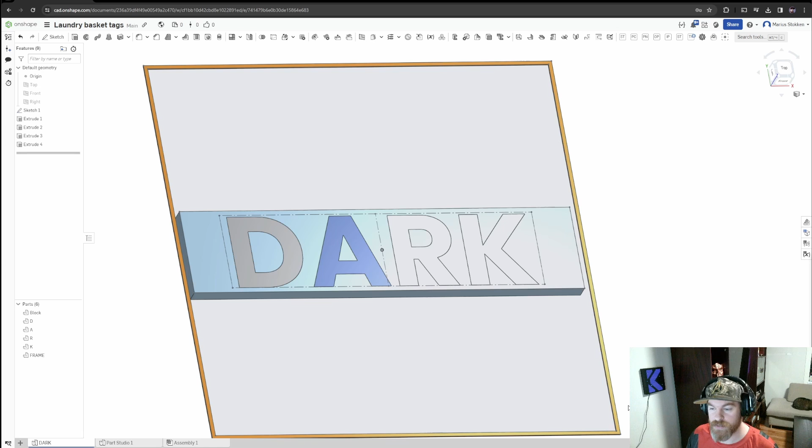So this is the existing thing that we are going to make, but it's not going to be called dark. I could go into my sketch and just rename and work from there, but I want to show you from start to finish how I do this. So in Onshape, and as I've said, this works with any software, I'm going to do this how I like to do it. There may be other ways to do this.

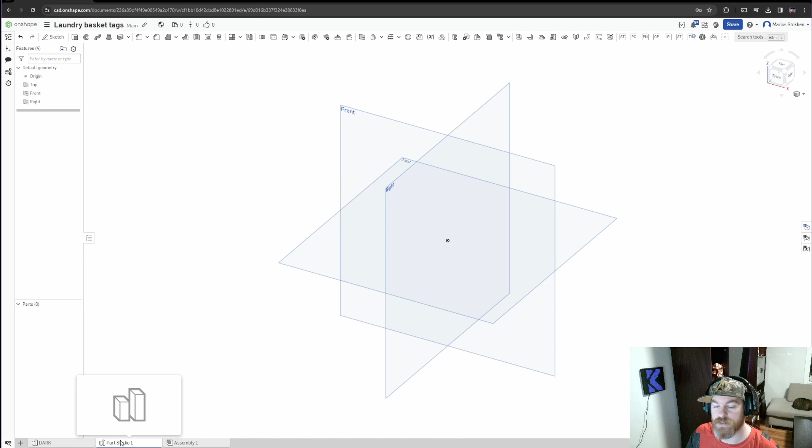First thing I'm going to do is rename this. So I'll call this white, because that's the writing, because I want one of these tags for all my white clothing.

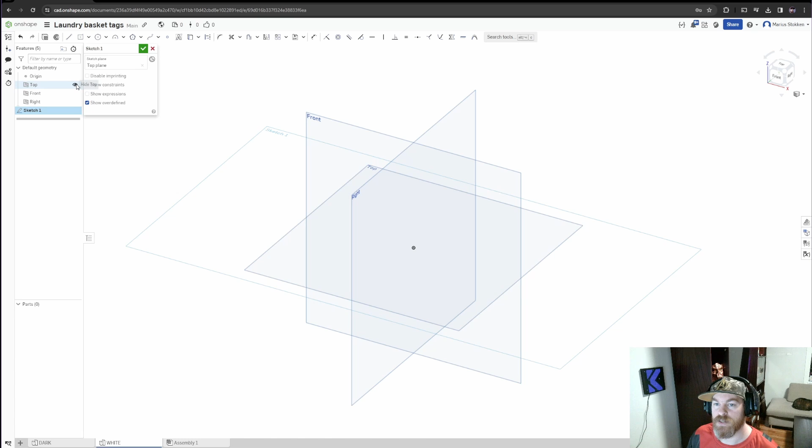And we're going to start by pressing sketch and selecting the face that we want to do this on. I usually just select the top face, and I'll hide these other ones to make it easier to see. Also at the top here, I'm going to orient it so that I can see straight on to what I'm doing. So first thing we're going to do, we're going to set the outside boundary of this.

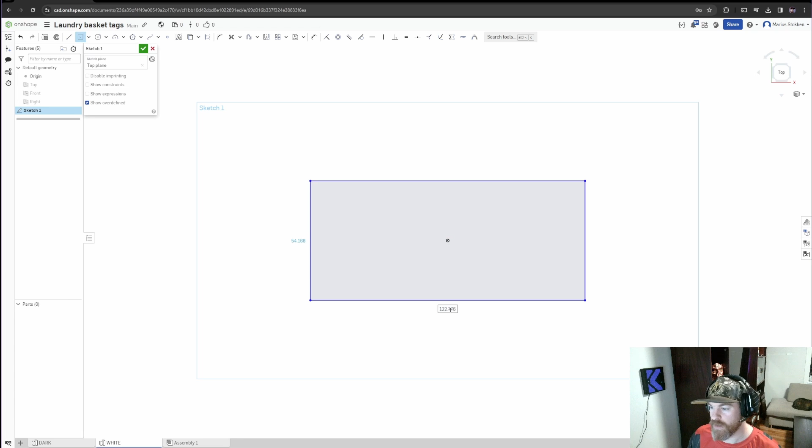So I have that measurement. I'll go to center point rectangle, and I'll just make a box. I don't have to worry about this when making this box. Now you can see that if I hold my mouse over these two values, I can edit them. So I'll type 110 because that's the measurement that I want for this, and then it automatically selects another one. So I'll do 25, that's the other one for this.

And now let's just make a box so that we can resize our text box. This is just how Onshape works. So I'll make a construction box this time, and I'll set it just roughly that size.

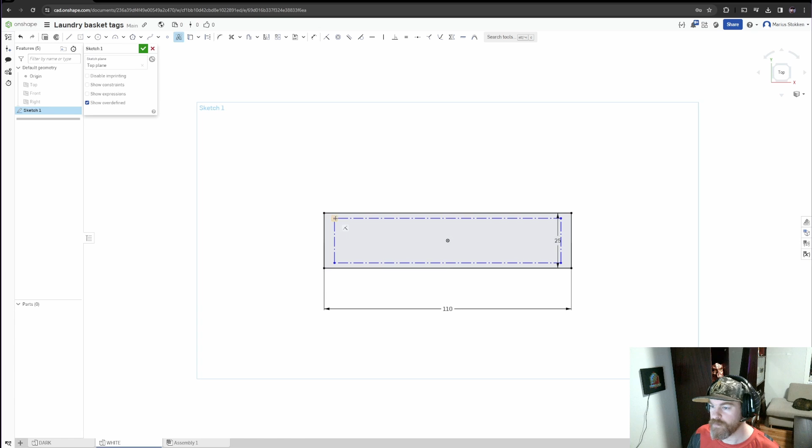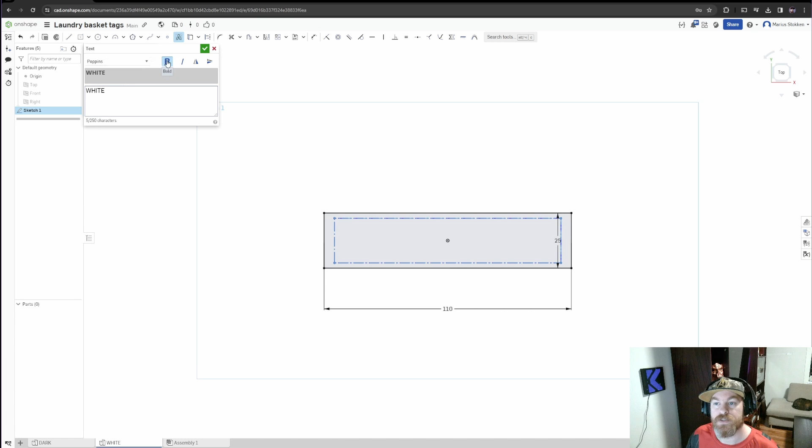And then we'll go to text and make sure we hit both of these two corners right here. That'll lock the text box to the construction box that we've set earlier. And in this text box, I'll just type in white because that is the name. I prefer to do these bold, makes the letters a little bit easier to print. You can choose whatever font you want, for this one I selected Poppins. It's nice and simple to read. Just hit OK, now that looks pretty good.

For this one, I know the size vertically for the letters, and I want to get it as close as I can. But because this is more letters than the dark one, I won't be able to stretch it out as much.

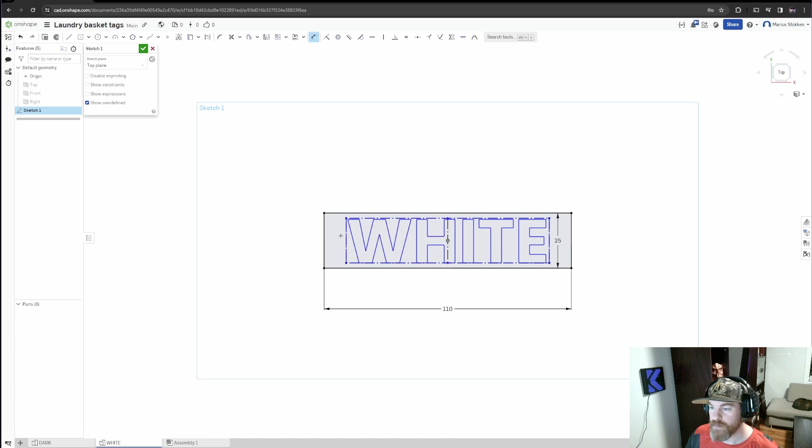So let's go to dimension and let's select that line right there. Right now it's 20.2, let's do 24. How does that look? That is probably a little bit too much. So let's just double click that again and do 23. And that looks pretty good to me.

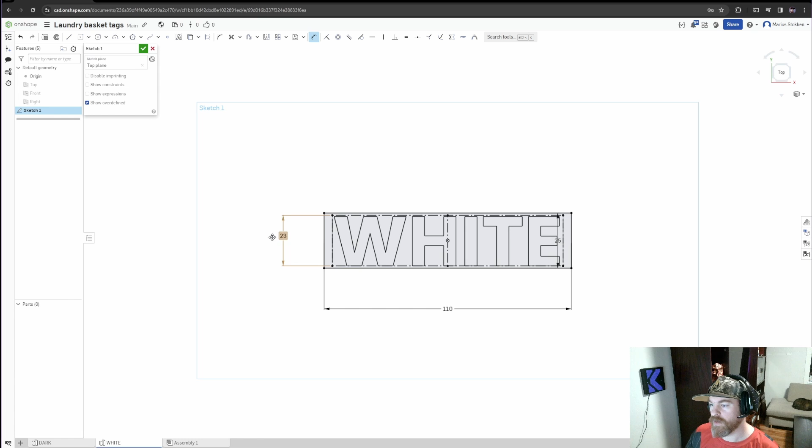Just comparing it to this and the fact that I know the height of the other one, that's it for this part of the build.

Now let's do how we are going to center this as easy as possible. So what we're going to do is take advantage of the fact that the slicers can center or align parts by itself. So for my build specifically, I'm going to print this on a Rook, which has a print bed of 120 by 120.

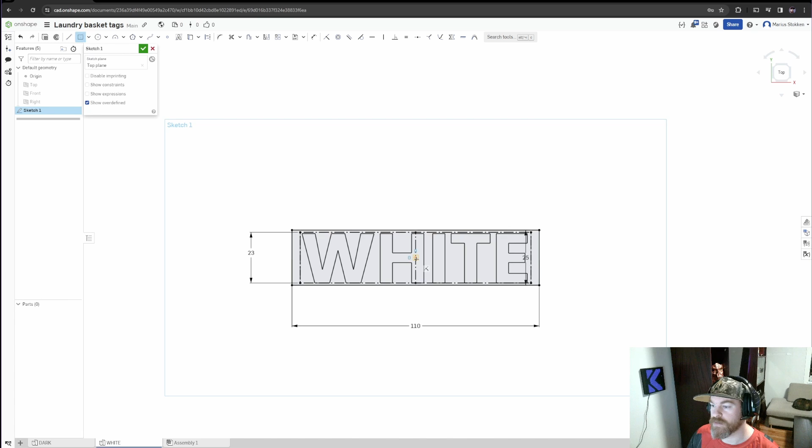So what I'm going to do is select another rectangle, a central rectangle, and make a box, and I'm just going to type in 115 or 112, just slightly bigger than the item that we're making. So let's do 112 by 112.

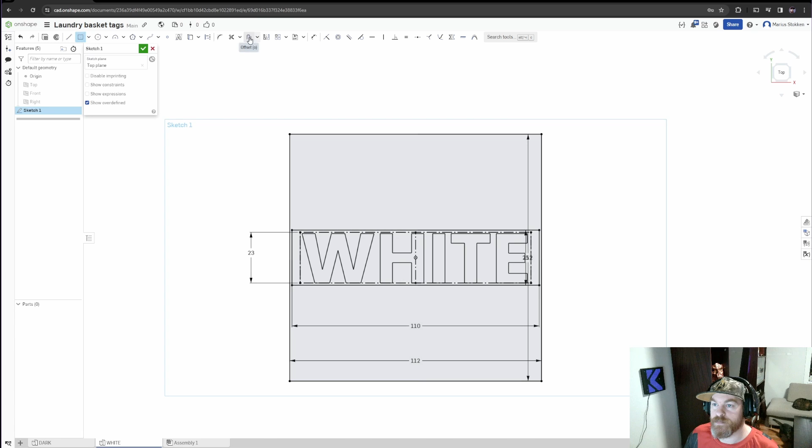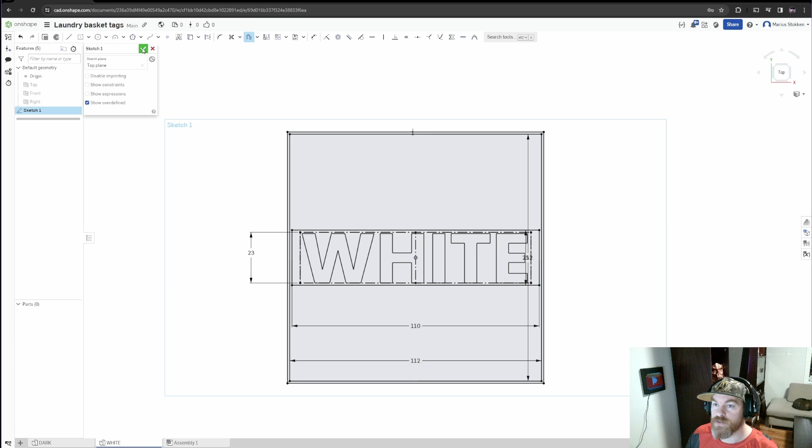Now let's do an offset on these 4 lines right here, and I'll do it outwards, hit enter, and do 1 millimeter. So now I have a print that's 114 by 114, which is more than enough for what I need. That'll fit inside the print bed of my Rook. So I'm going to finish that sketch.

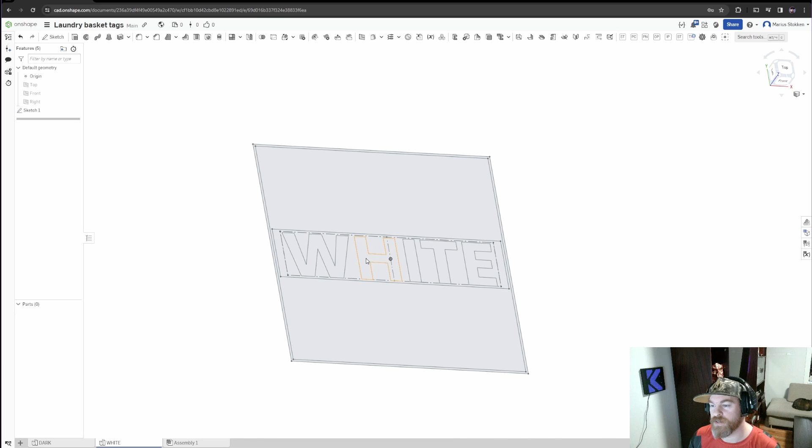Next we're going to start extruding. There's 2 ways of doing this. I could have made the text reversed when I made it, but for some reason my head doesn't like how that looks when I'm working on something, so I prefer to do it this way and extrude it the wrong way. I'll extrude from the face we're looking at and back, not towards us. So let's start extruding.

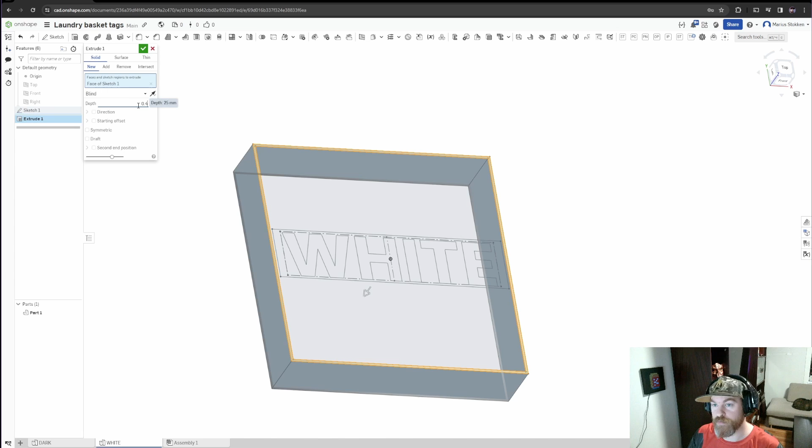The first thing I'm going to extrude is this box right here. First I'm going to make sure it goes back from where we are, and then I'm going to do 0.4 millimeters. That'll give me a small box that will serve as a really big skirt on my print. Let's go back to our sketch and turn on the visibility.

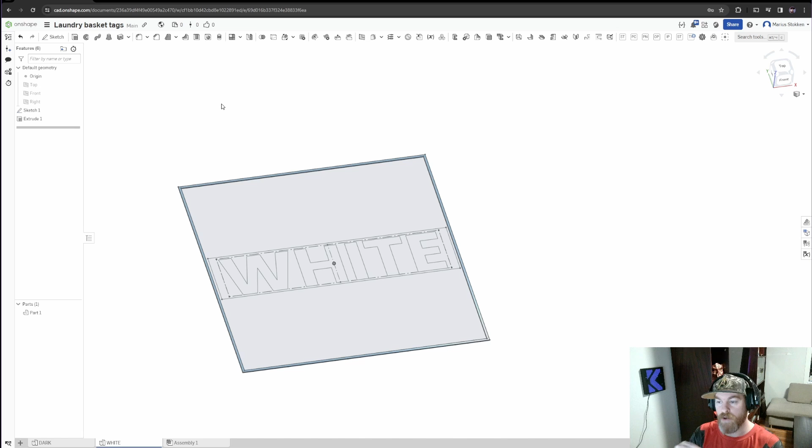Next I'm going to do the actual box that all of this goes into. Again, this is how I do it, you might do it a different way. The thickness of this is what I'm going to do next, it's 4 millimeters, and I'm going to do opposite direction because I want to extrude from me, not towards me.

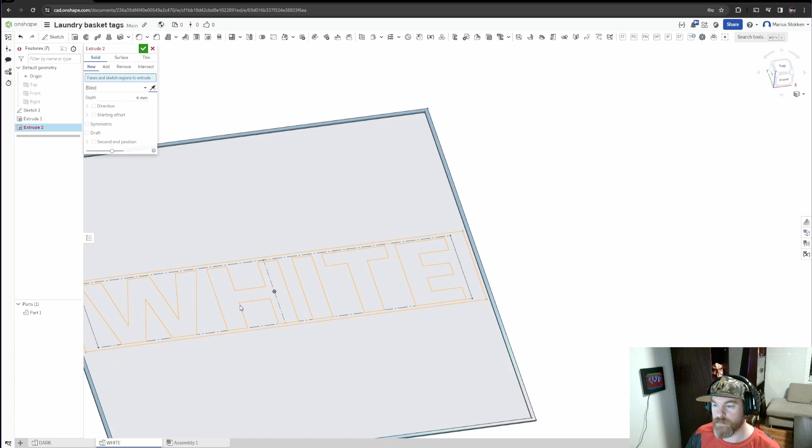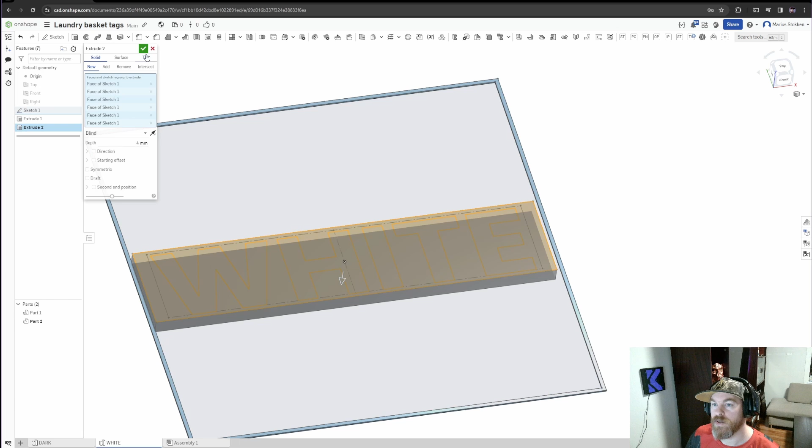When I click on this box, it'll extrude everything around this text. For this, I want to extrude everything, then cut a hole into it. So I'm just going to include all the letters like so, and then hit OK. Then I want to make a recess into this.

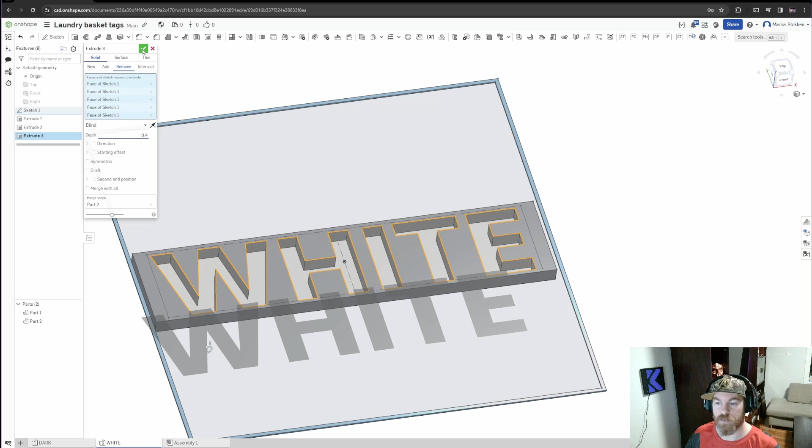That's the space for the white letters in this case. So I'm going to do extrude again, but this time do remove, and select all the letters. We want that 0.4 height because that's two layers with white filament - you want at least 2 layers. If you have translucent filament, the background is going to affect your print. So we're doing 0.4 millimeters, and that'll give us the black part of this.

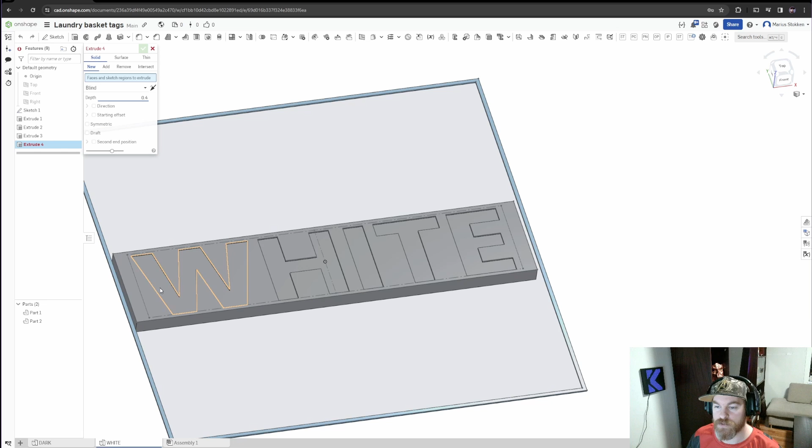Finally, we are going to extrude just the letters. So let's do extrude, make sure it's on new, and do 0.4 again. What's going to happen now, as soon as I click this and do opposite direction, as we should - in some cases, like it just did there, it'll switch to add. So make sure it's always on new. And then the I and the T and the E. Now that gives us a bunch of different parts.

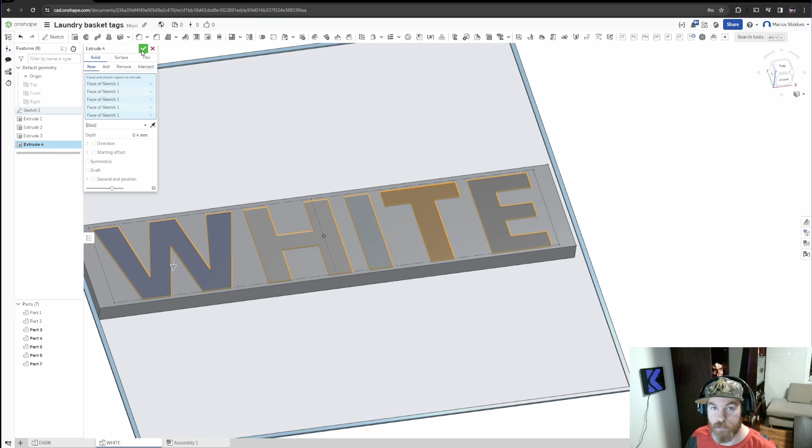And now we have that finished print. So to send this to our printer, for my own sake, I like to rename my parts. So I'll rename that to... let's rename that to just box, because it's the box around. And let's rename the second one to block. Then I'm just going to rename each of these to the letter.

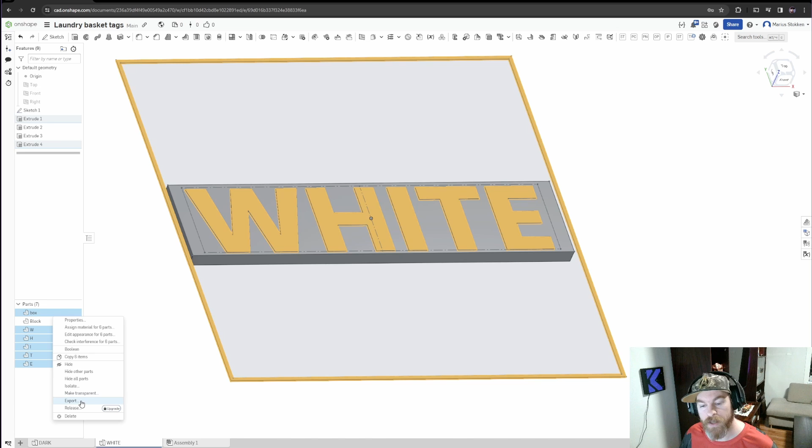Now we have all of our different parts labeled, so this next part is going to be easy. I'm going to select all of my letters and also my box, then right click and export. Depending on your slicer, you want to export into an OBJ, an STL, or a step file. I do step for most things I do myself because I use Orca Slicer and it just works with step. On bigger prints, STLs and OBJs have better resolution, but I always export in step, so I'm just going to keep doing that.

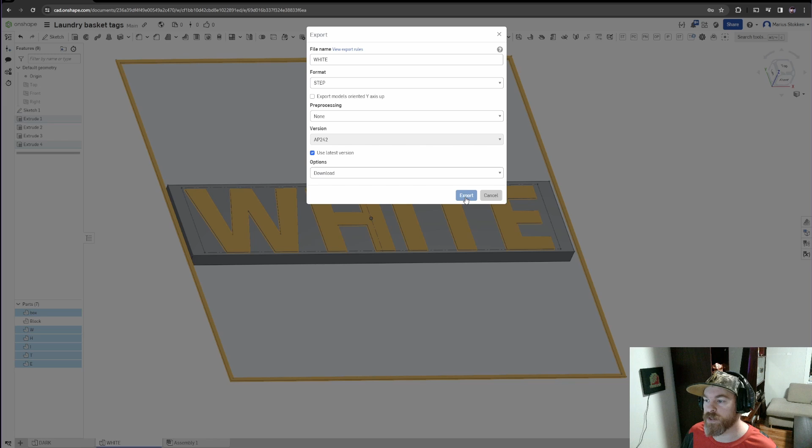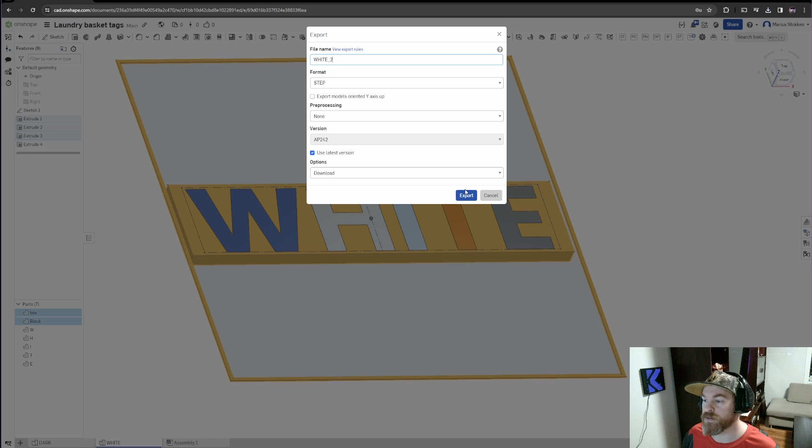And now that is going to export. Next, I'm going to select the block and also the box and hit export again. I'll call this white, then underscore 2 to make it easier to differentiate, and export. And that's it. So let's jump into the slicer, and I'll show you how to orient and make it ready for printing.

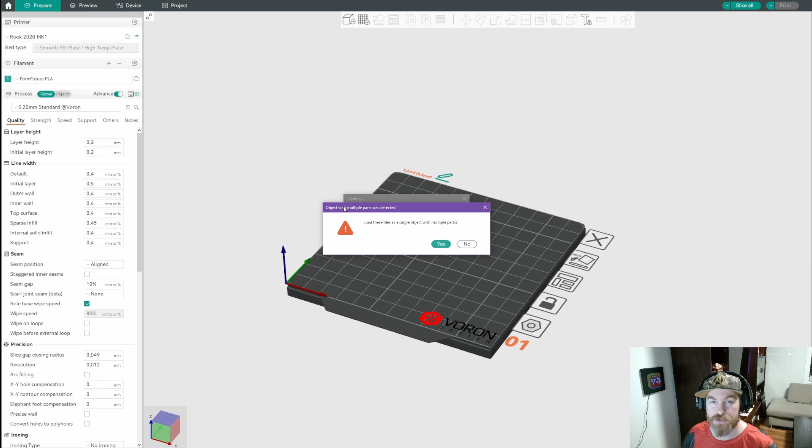And now we're in Orca Slicer. Let's just import both of our objects. If it prompts you to load them as single objects with multiple parts, press no - that'll make this way harder, or practically impossible. So add plates, because we have 2 different plates in Orca Slicer. In other slicers, you have to do this on the same plate and save it twice.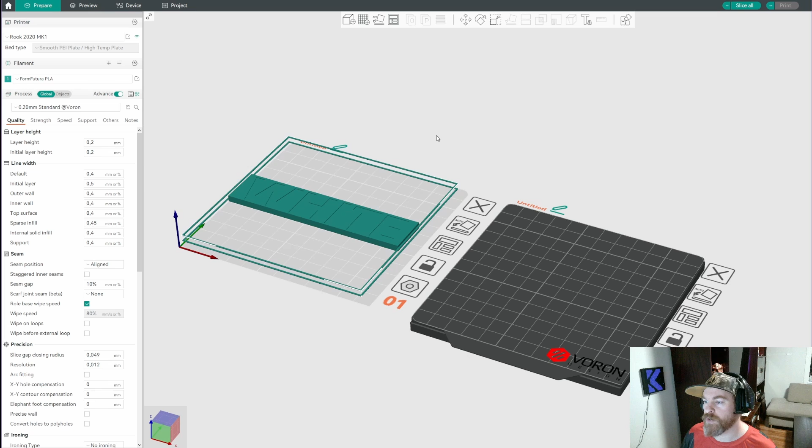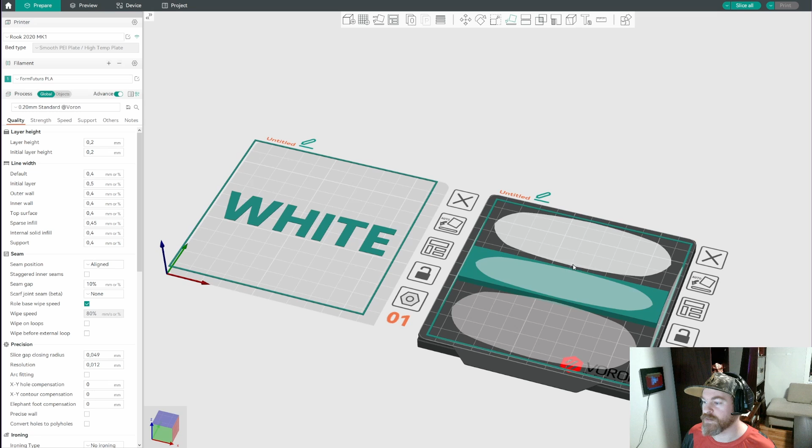Then I'm just going to drag my second box over to this one, and you might see that this outside box, the perimeter box, is floating and it's the wrong way. So let's quickly fix that by selecting our part and doing lay on face, and select that face. Remember to do it on the other one as well to flip the text. And even though it's upside down, they are both the same orientation, and that's the important part.

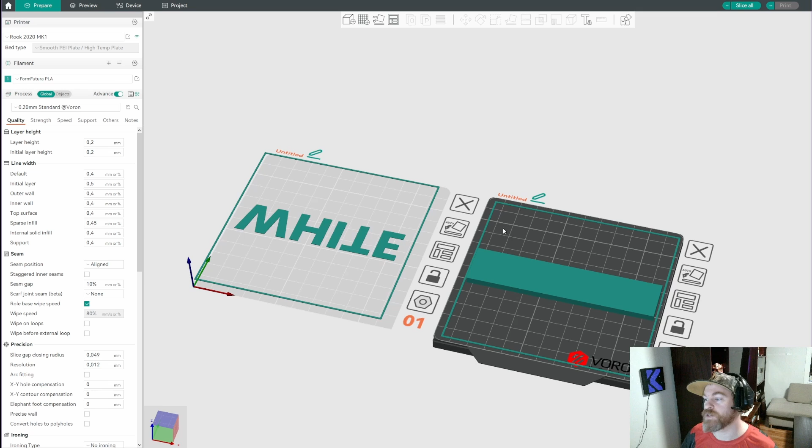Now, to align both of these so it prints exactly on top of each other, luckily we have that tool - it's called Arrange Objects, and that'll auto align it to the center of the bed. Because of that box, all of the text is aligned. So I'll do that for both. And for Klipper, that's all you need to do for your slicer. I do recommend keeping in mind that you're printing - so we set our layer to 0.4, I'll print this in 0.2. If you're going to do higher or rougher layers, you need to account for that in your design.

Make sure that elephant foot compensation is not on. That just makes the transition between the text and the background cleaner. You can do elephant foot compensation, it'll give you a slight edge, and for some people that'll look clean as well. Other than that, there's no real change to the slicer.

So I'm going to slice these and send them to my printer, and then we'll look at the changes you need to make if you're doing this in Marlin and in Klipper. Let's first look at Marlin.

For most Marlin setups, you can change just your start and end G-code in your slicer. There shouldn't be any need for you to change your actual G-code file. So let's go to printer settings in PrusaSlicer, custom G-code. This is an Ender 3, doesn't have bed mesh leveling, but we should have to change some of these values. We don't want it to home, we want to do that manually before the first print.

So I'm going to just put that in, so that'll make sure your printer will ignore that line. When we're finished with this, we can just go back and change it. We're also going to change our M84 in the end G-code. That'll make sure the motors stay on so we don't have to home between the two prints. Remember that if you have your printer doing mesh leveling, you need to disable that as well in here.

Now for Klipper, we practically do the same. Let's go into machine, let's find our macros. These are either in your printer config, or I like to have mine separate, so I'll go into my macros.cfg. I'll look for my start print. Some setups have this as print_start, so make sure that if you're looking for it, you look for the word start. In here, this is a bunch of things that does different things on your printer.

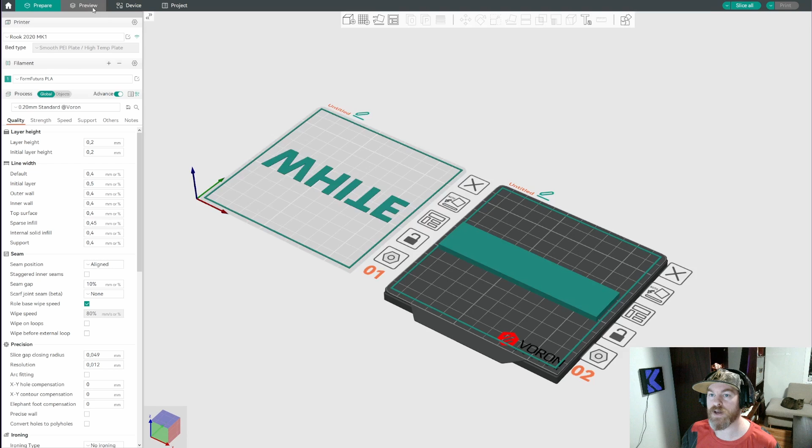Now that our bed is heated, let's go ahead and home the printer. Next, let's do a bed mesh calibrate - I have a macro set up for my meshing. Now that our mesh is done, we'll just go to our slicer, and we have all these files prepared. So let's upload and print the first one, and only upload the second one. Because we've already homed and done our bed leveling, the printer should just heat up the hot end and then start printing. So I'm going to head over to the printer and let's see how this looks.

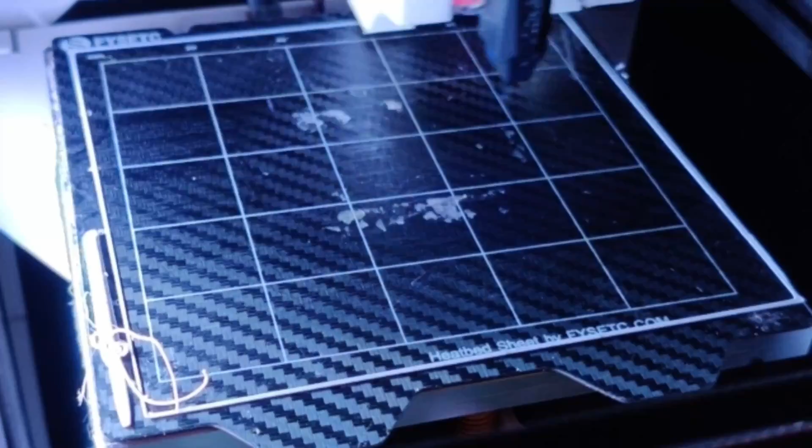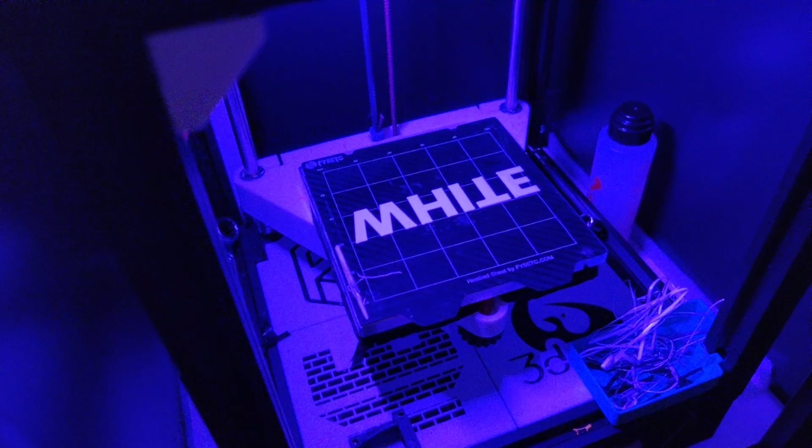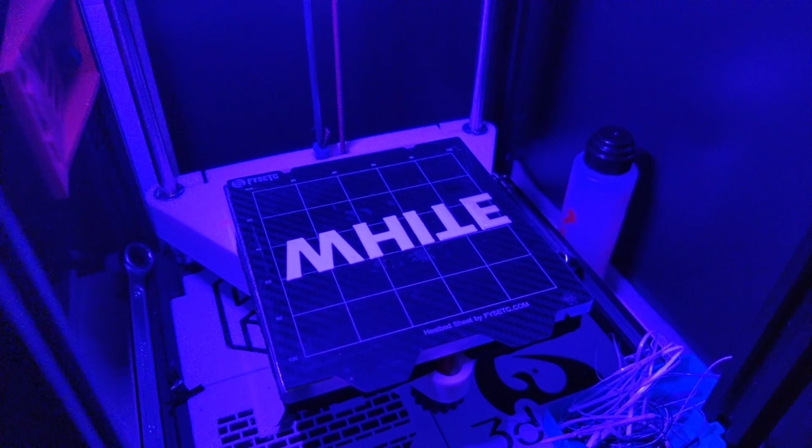Now that we have the text printed, let's go ahead and remove that little piece, and also let's get this little piece off. And let's swap filaments and print the black parts.

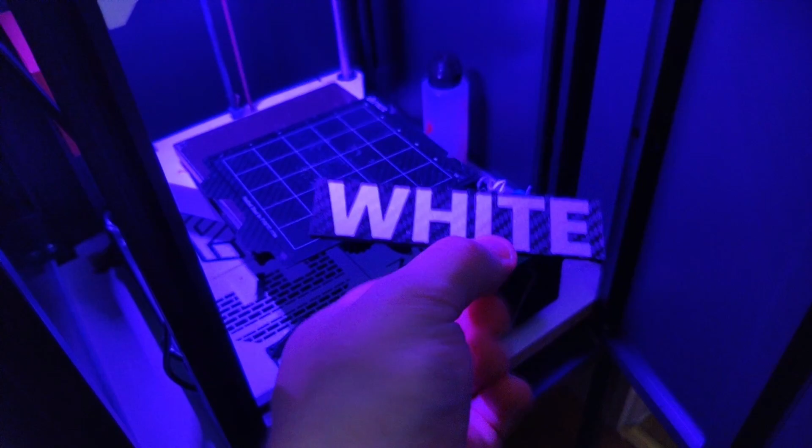And moment of truth. This was difficult one-handed, sorry. And there we are - one finished print.

It looks good and it's functional. And I do know that I could have just used this method, but this is something you can do that most other people with a 3D printer won't do. So separate yourself, or just include your logos when you're printing stuff. You can do this on the bottom of a print, you can do this as a top piece of your print if you print it upside down. There's an endless sea of possibilities here. So I hope you followed along and it was easy to do, and I'll see you next time.